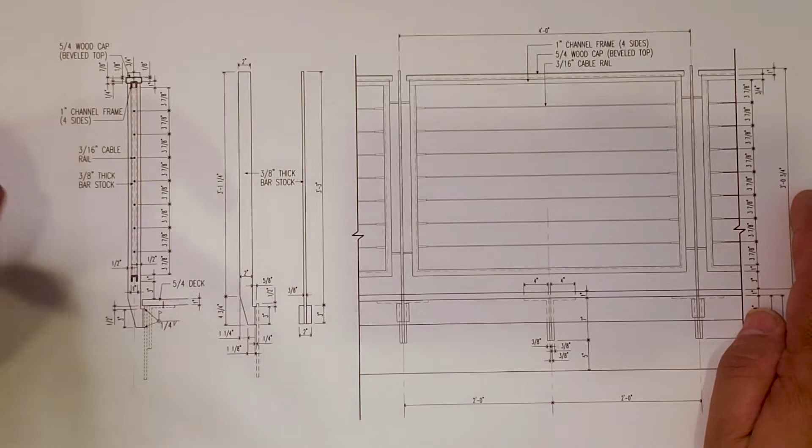All right, everybody. So, here we go. We got the detail, we got Big Red, and let's start talking deck details for the rail system. All right, so you can see here, we have a couple different elevations. This is a blow up from the front elevation of the deck. You can see here, there's our knife-like rail that comes down. And these are the angles beyond. We talked about those in the earlier videos.

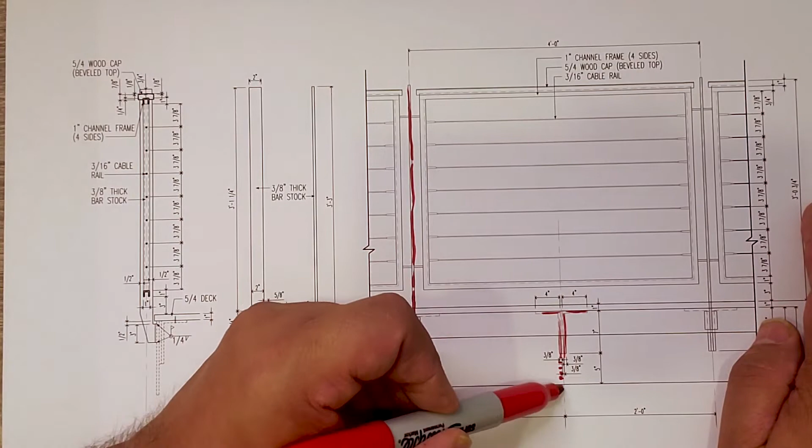Those are 4" by 7" with the little 3/8" spacer so water can drip out, right? But we're aligned, we're on that module of the 2 foot. Those angles were on 2 foot center, our rails are on 4 foot center. So we maintain that module. So let's talk about the rail system here.

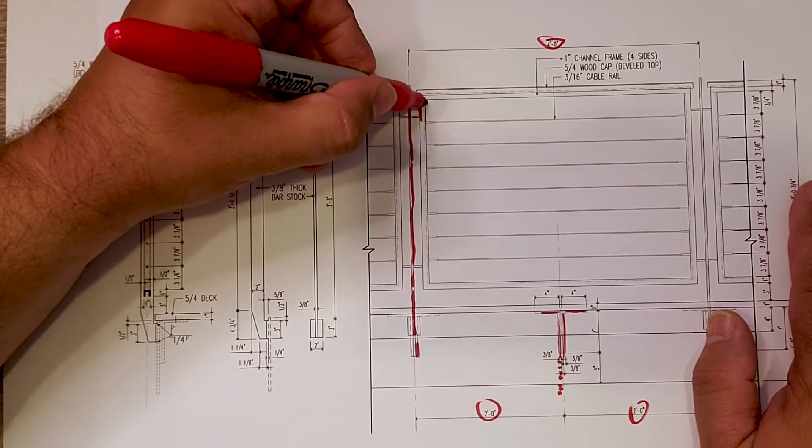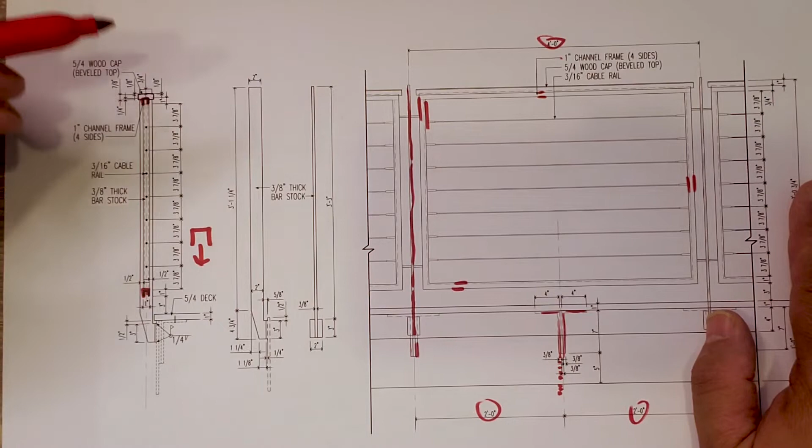We have 1" channel that goes around the perimeter. And it is not a square tube. It is, in fact, a channel. You can see it here. It is U-shaped and it is facing down so that it can't hold any water. Not only that, but we have a piece of 5/4 that is the wood cap here.

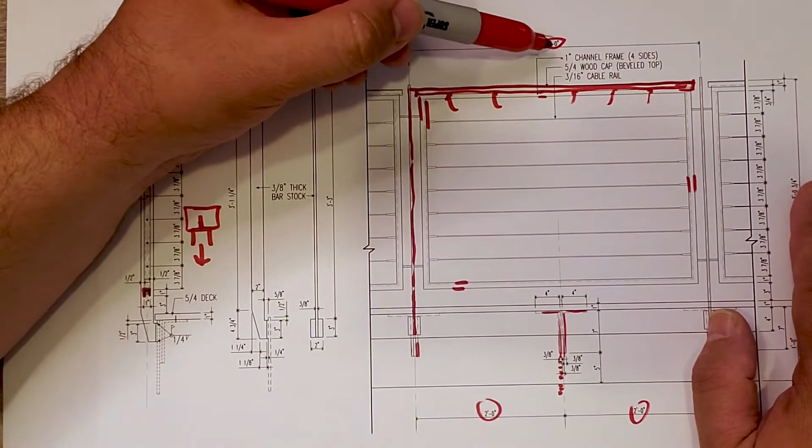Right. So we needed that channel to be able to put a screw up into that wood cap. So we have our screws that get installed up through there. That channel was pre-drilled so that it can accept that rail. And notice the rails, those cable rails, they stop just before that knife-like baluster.

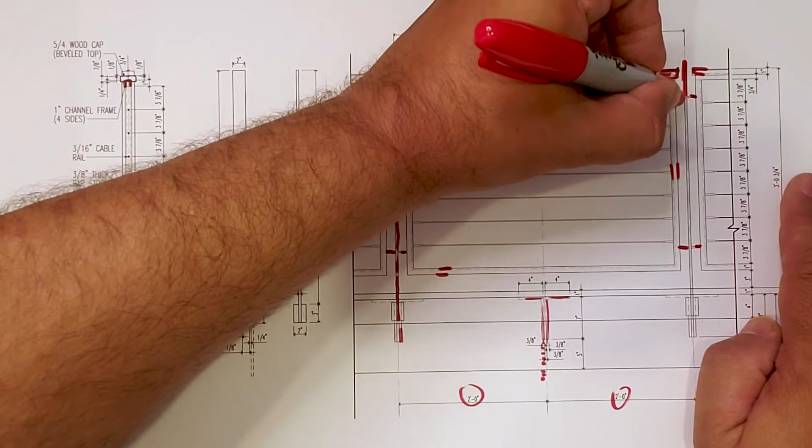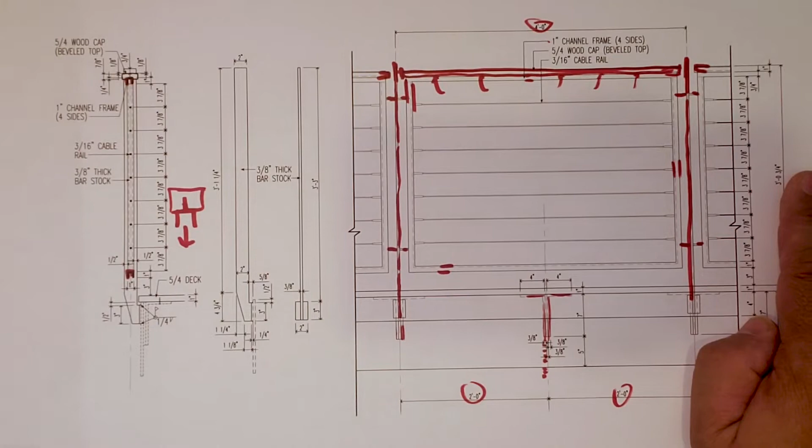So all intentional. And then we have these just little 1/4 clips here that are holding that rail frame in between the 2 balusters. So it's meant to look very dainty, very light, even though it's steel. The beauty of steel is that its strength to weight ratio is very, very high. It's a very strong material, even with just little 1/4" pieces. It can certainly do the duty we ask for it.

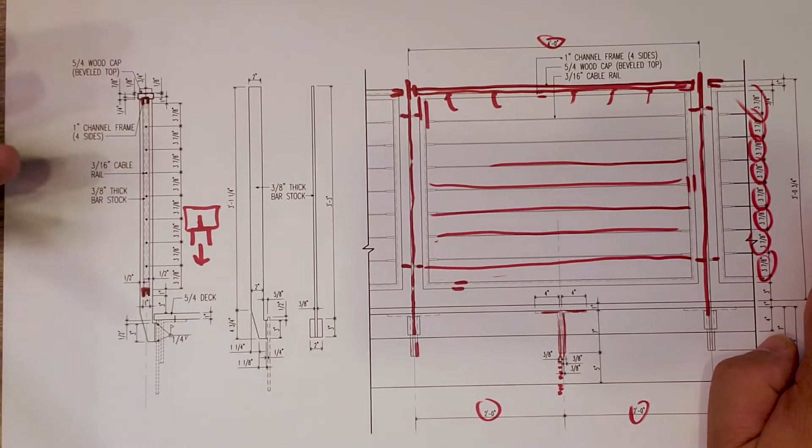And then you can see we have our rods here that go in between. You can see those are all spaced 3 7/8. They have to be less than 4 inches. And so we have that all called out. So Emmett can make that whole setup in the shop, basically bring it out, and then just weld it up into place.

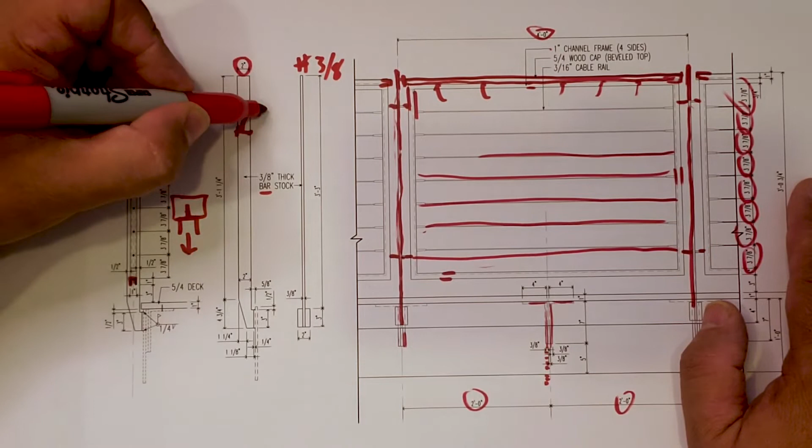As far as what are these, I keep calling these knife-like balusters. They're nothing more than a piece of 3/8" bar stock. You can see here this is kind of a front elevation through the 3/8" dimension. And here you can see it's labeled there. It's 2 inches in width. And notice that I called for it to have taper because I want everything to kind of keep going down to the smallest dimension that I can make it.

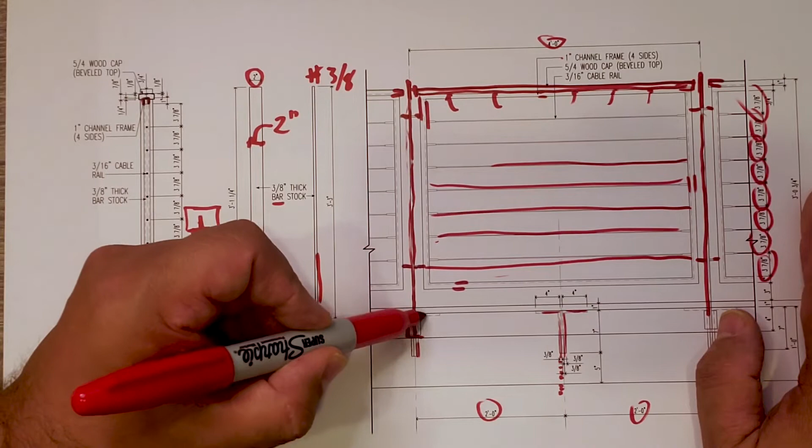And then there was a little 3-inch, basically, welding plate that the bar stock was then welded to, and then that welded plate can get welded around. It just gives us a larger surface area to attach that to, as well as it makes it a little easier for the guys out there to do that install.

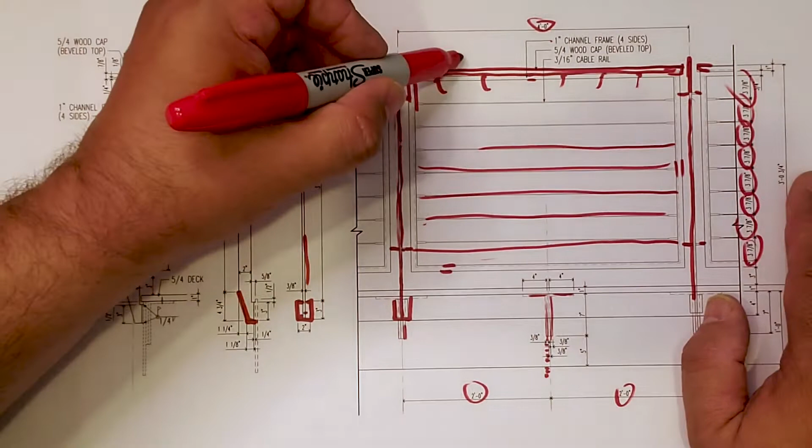And then carrying on, you can see here, again, here's each one of those rods. The spacing is basically a section in through this frame here, right? Taking a look at it, and you get to see that wood cap there. The knife-like balusters, just slightly higher, has that channel. Channel comes down. All of those rods fit inside that. The bottom channel there, 3 inches off the deck, 1-inch channel.

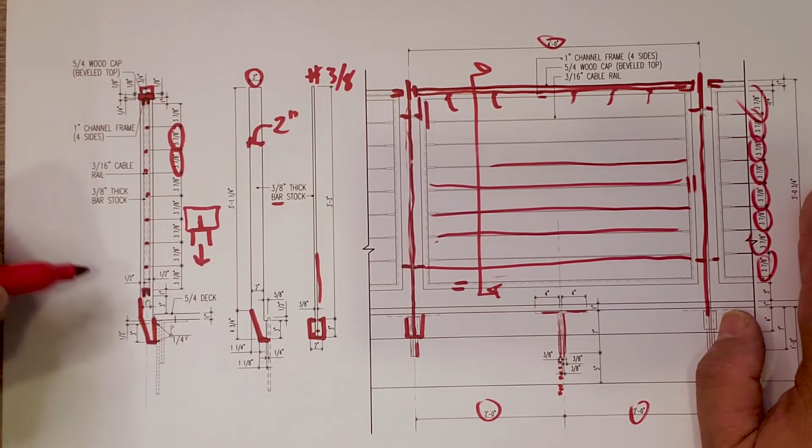There's our tapered knife-like baluster, 2 inches wide, like that. And there is the rail system. You'll see there's a slideshow coming up. In the corners, it actually ends with the rod and the wood, and then we have the other baluster with the wood cap attached. There's nothing out in the corners, and that was intentional.

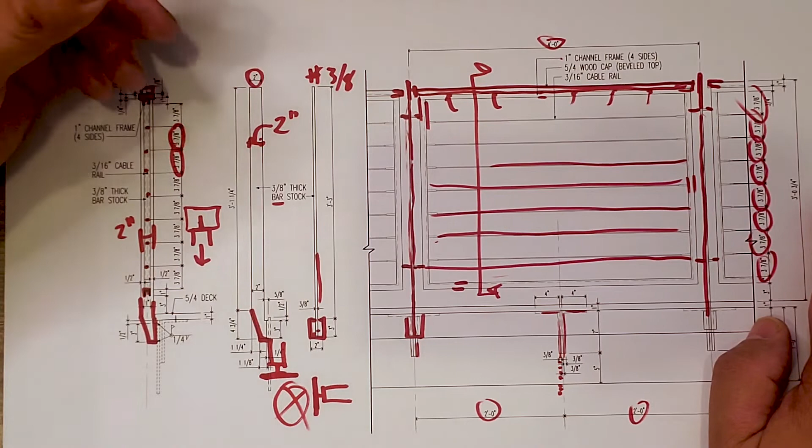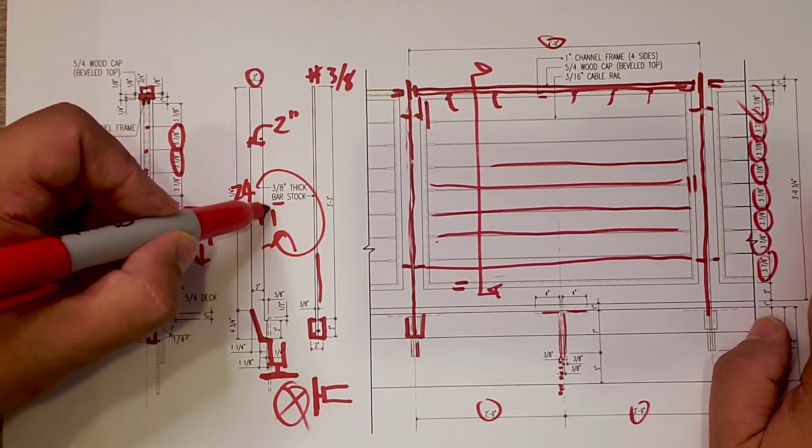Again, the whole idea of this deck is to kind of take it to the maximum that we can to remove as many pieces as we can to disseminate it into that air. Remember, we're trying to be true to our parti. If you want to know what the parti is, go back to video 1 and video 2 where we talk pretty heavily about that. But you can see here we are in video 24, and we're still kind of circling back to video number 1 and number 2. So it's a whole lot of information that has come full circle.